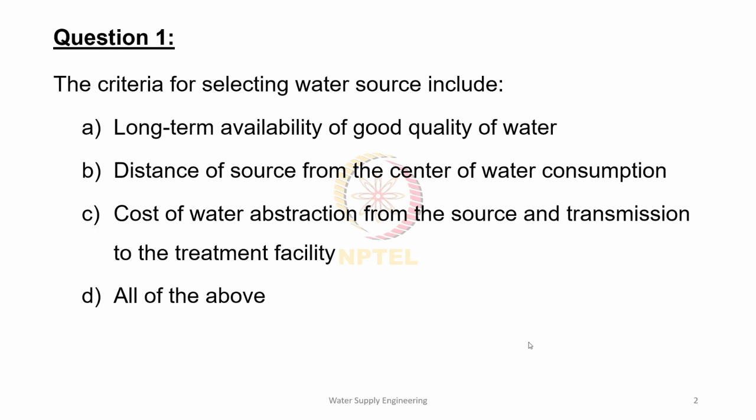All right, so we'll see what is the answer. Yes, correct answer is all of the above, as you have answered. So what are the criteria for water source selection?

When we plan to develop or design a water distribution network for a city or a place, the first thing we need to know is the demand, the requirement that we saw in earlier classes - how we calculate demand, what factors are to be considered while calculating demand. Now, once we know the requirement of the city, the next thing to select is the source of water.

Which one is best suited for that city is to be identified. For that, we have certain criteria. The first one is characteristics of source or sources of water and water itself. Second one, regional geographic properties. Third one, feasibility for stage wise development. And fourth one, economics and cost. So these four factors are to be always considered while selecting the water source.

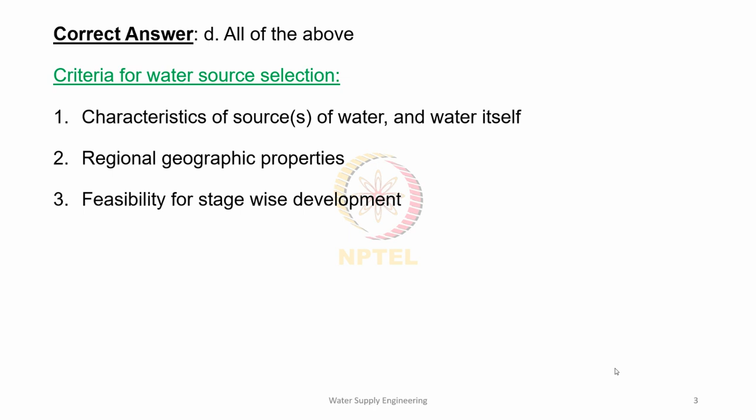The first one is characteristics of source of water and water itself. The first thing we need to check upon is the characteristics or the quality of the water source as well as the water available. It includes availability of water, that is the quantity available, and general longevity of the sources - whether it is available for a short term or for a long term.

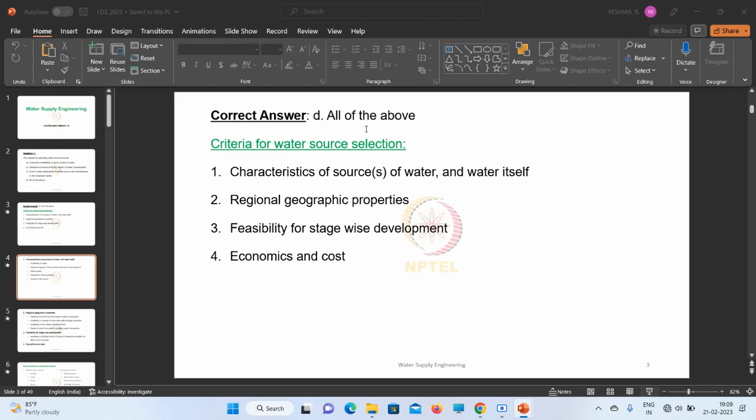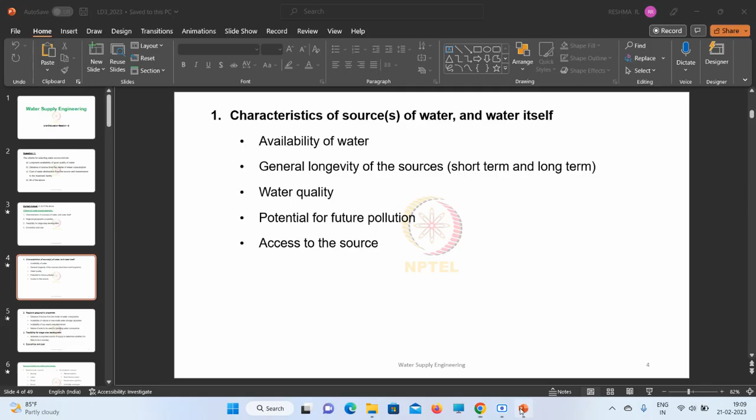So we were talking about the characteristics of sources of water and water itself. It includes the quantity available as well as the longevity of the sources. Longevity of the sources indicates the term over which the water is available, whether it is a permanent source or a temporary source. If it is temporary, whether short term or long term availability is there - all these factors we have to consider.

The water quality, which is the most important factor to be considered, is water quality. When it comes to quality, when we check the present quality status of the water, we need to make sure that the water won't be polluted in the future as well. That is the fourth point - potential for future pollution. Even though the water is fit for drinking or domestic purposes in the present status, we should ensure it will be the same in the future, that it should not get polluted.

And the last one is access to the source. We should be able to reach up to the source so that we can take as much water as we need to the required consumer point. So this is the first factor or first criteria that we consider while we select the source of water for the water distribution network.

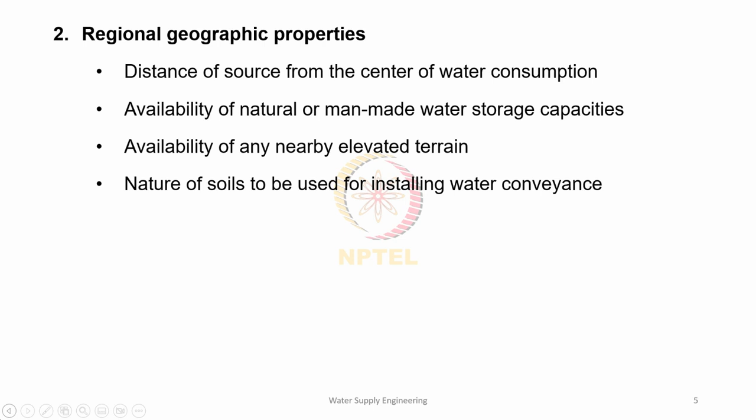Moving on to the next criteria for selecting the water source: feasibility for stage-wise development. Feasibility study means we have to assess whether a proposed source of supply is likely to be a success or not. So once we have selected a source, we need to make sure it will be a success by conducting a feasibility study at each stage of development, to assess whether it is feasible or not.

The last criteria is economics and cost. Even though all the other criteria are met, if the cost of construction and maintenance exceeds our available budget, we may not be able to go forward with that source of supply, and we may have to change it. So economics and cost also play a role in deciding the source of water for the water supply system.

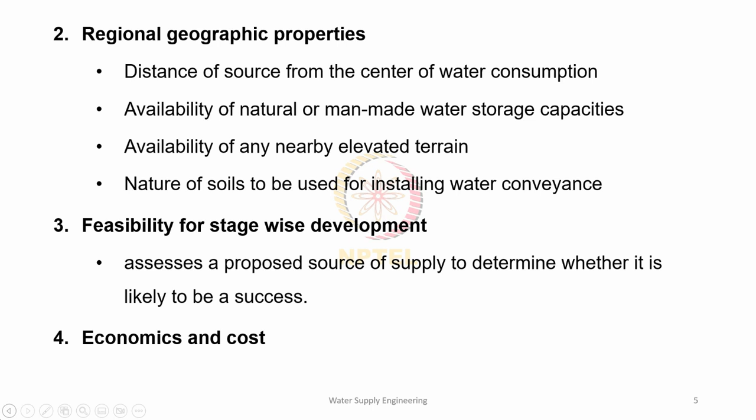Now, having seen all the criteria for selecting a water source, we'll see which are the sources of water for public water supply. The first set is surface water sources, which include springs, lakes, ponds, rivers, reservoirs, estuaries, and wetlands.

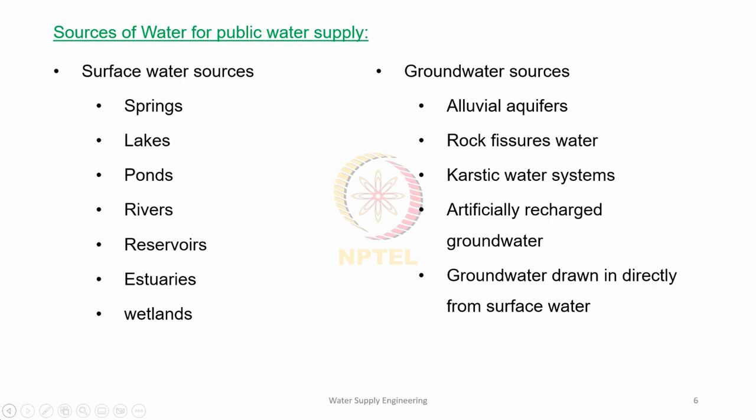Second, we have groundwater sources like alluvial aquifers, rock fissure water, karstic water systems, artificially recharged groundwater, and groundwater drawn in directly from surface water. We also have atmospheric water in the form of rain and storm water, recycled wastewater, and brackish or saline waters.

Atmospheric water, as everyone knows, is rainwater or storm water that comes as precipitation from the atmosphere down to earth. Recycled wastewater is nothing but water that is recycled after first use and provided again for reuse, usually for flushing, gardening purposes, etc.

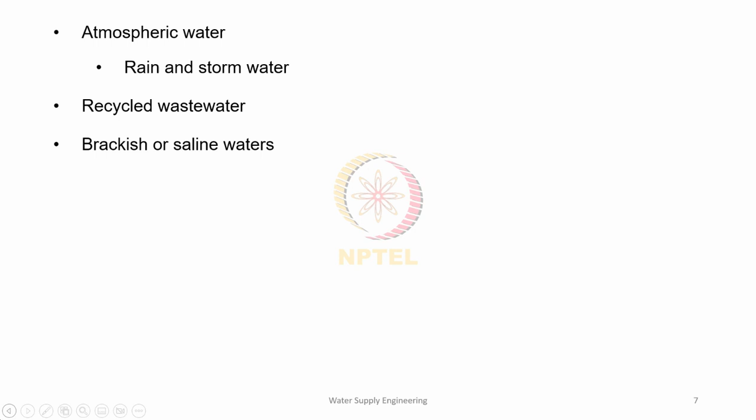The third one, brackish or saline water, is water from the ocean, which we desalinate and then supply. So among these, surface water and groundwater are the first sets we'll look at. First we will go through each of the surface water sources, and then we'll check the groundwater sources.

The first surface water source is spring. What is a spring? They are natural exit points at which groundwater emerges out of the aquifer and appears on the earth's crust to become surface water. So springs are actually groundwater emerging at a particular point on the ground surface to form surface water. It is part of the water cycle as well as the hydrosphere.

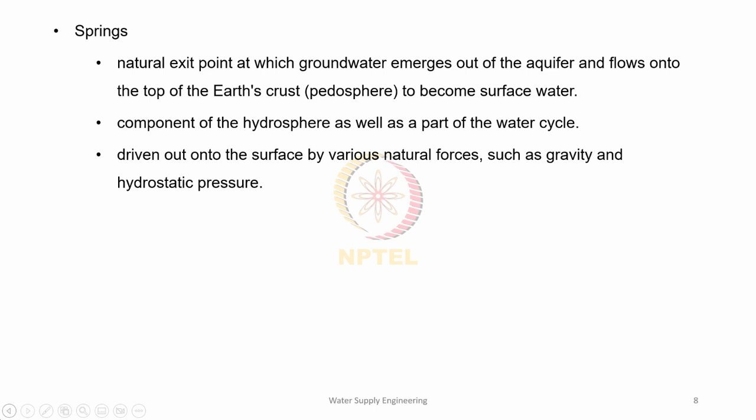This emerging of water at the exit point happens due to many natural forces, for example gravity or sometimes hydrostatic pressure, but the forces are purely natural. Some natural force acts on the groundwater and thus it emerges at the exit point, forming surface water.

The second surface water source is lake. Lakes are also naturally occurring, relatively larger water bodies but completely surrounded by dry land, with the flow much slower than any inflow or outflow streams that feed or drain it. That means it has very less flow rate compared to the feeder or draining streams, and they lie completely on land, not connected to the ocean like rivers. Rivers have a connection to oceans, but lakes are completely bounded by dry land.

Also, we have freshwater lakes as well as saltwater lakes, and these saltwater lakes can have salinity even higher than that of seawater.

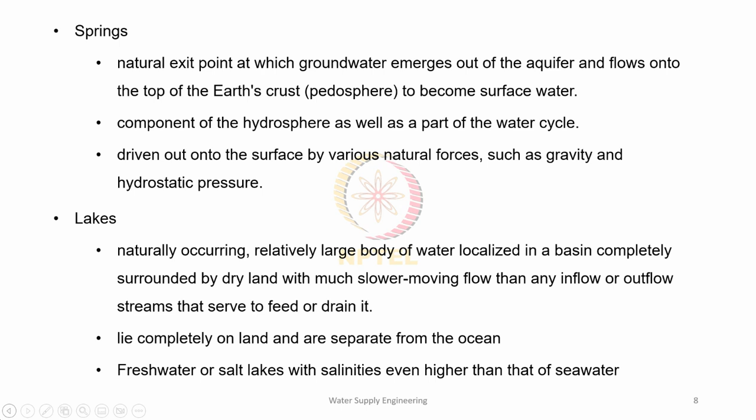Moving on to the third surface water source, that is pond. A pond is a small, still, land-based body of water formed by pooling inside a depression, either naturally or artificially.

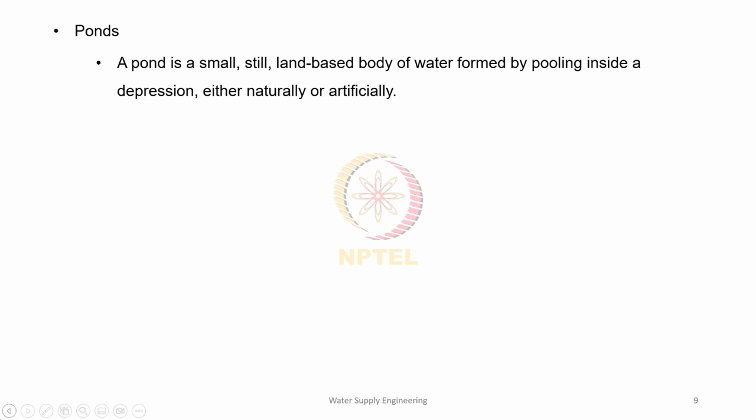Earlier we told springs and lakes were naturally occurring and had some flow, but when it comes to ponds, they can be made either naturally or artificially. The fact is that the water will be still and it will also be bounded by dry land.

The next one, the rivers, they are natural flowing water courses, usually freshwater streams. They may flow over the surface of the earth or may move towards another water body at lower elevation, for example joining an ocean, bay, sea, wetland, or even another river. Then we call it tributaries, major river, etc.

And during its course of time, it may even get dried, it may flow into the ground as well. And if the rivers are small, they may be called creek, brook, or rivulet.

The next surface water source, the reservoir. Reservoir is actually the enlarged lake that we see behind the dam. It can be a man made structure constructed to store water or maybe a naturally occurring formation.

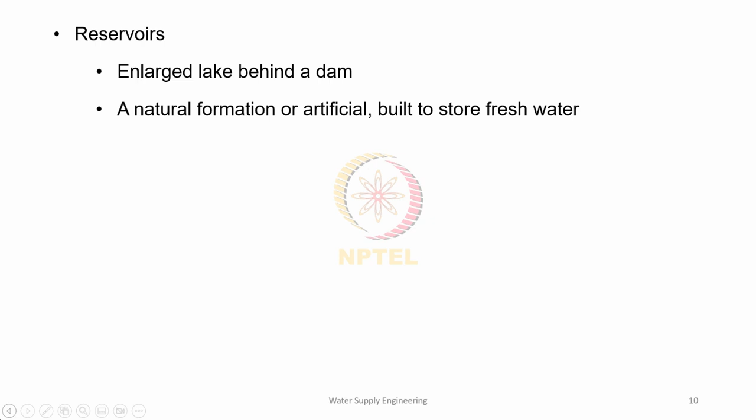The next one is estuaries. Estuaries are actually partially enclosed coastal bodies. On one side it will have the brackish water from ocean, and the other side it will have the inflow from the river or stream. Thus, it can be considered as a meeting point of river or stream with ocean.

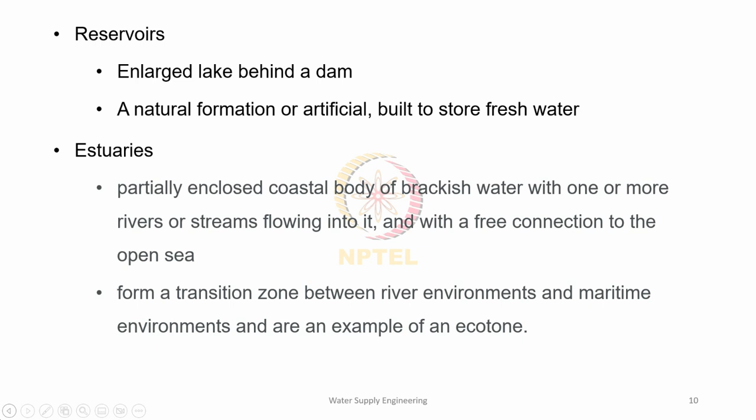Maritime environments and river environment conjunctions are examples of an ecotone or estuary. So estuaries always have one side brackish water and the other side fresh water from a river or stream.

The next one we have is the wetland. Wetlands are ecosystems with fresh or brackish water, as we saw in the case of lake. This can be a permanent covering or a temporary covering of water over the soil. Temporary in the sense it can be seasonal depending upon the weather or climate, for example it may exist only during monsoon season time.

Now, according to Article 1.1 of the Ramsar Convention, which is an intergovernmental convention on wetlands, wetlands are defined as marsh, fen, peat, and or water, whether natural or artificial, permanent or temporary, with water that is static or flowing, fresh, brackish, or salt, including even the areas of marine water, the depth of which at low tide does not exceed 6 meters. So this is the exact definition for wetland according to Ramsar Convention.

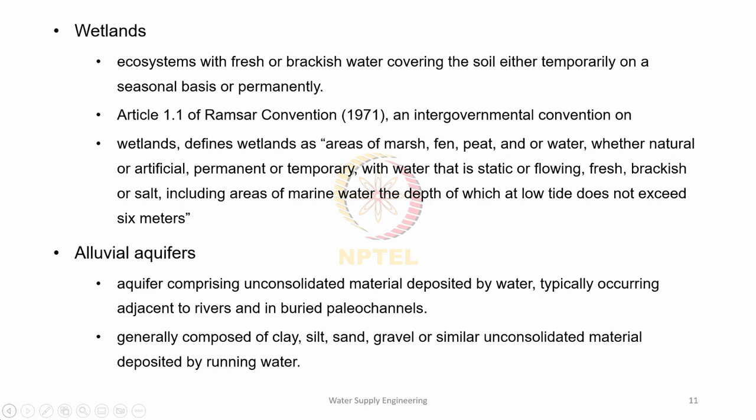Then we have artificially recharged groundwater. That is, if the groundwater potential is very low, if the available groundwater cannot meet the requirements, we may artificially recharge the groundwater. There are various means for that. For example, we can redirect the water across the land surface through canals so that it may infiltrate.

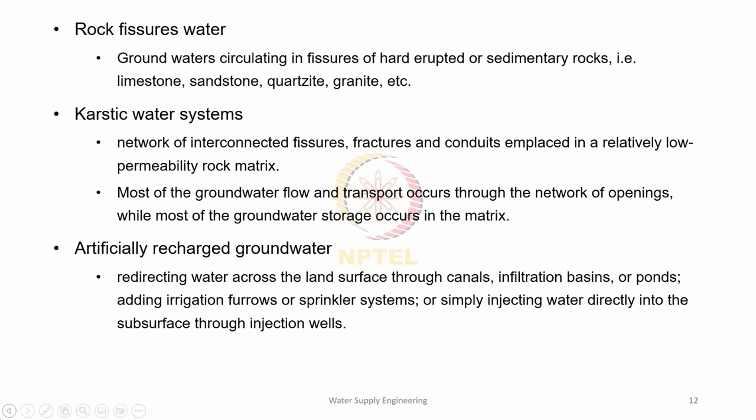Or we can use injection wells. Injection wells are nothing but wells where we directly inject water into the subsurface through these wells, applying water directly into the subsurface. So these are the different sources.

Last one is groundwater drawn directly from surface water. We have seen so many surface water sources, and due to infiltration or other gravity flows, this surface water can go deep through infiltration, percolation, etc., directly into the groundwater.

So these are the different sources of water, and we saw the criteria for selecting the best suited source of water for each particular case.

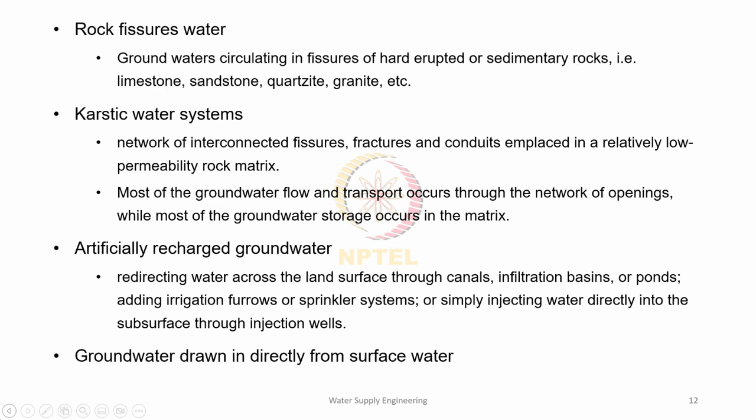Now we'll move on to the next question.

Question number 2. For surface water intake, the common type of shape provided for water entry through the inlet pipe of raw water from collection unit is: option A, concave type entry; option B, bell mouth entry; option C, flat type entry; option D, none of the above. So which is the common shape adopted for water entry through the inlet pipe of raw water in case of surface water intakes?

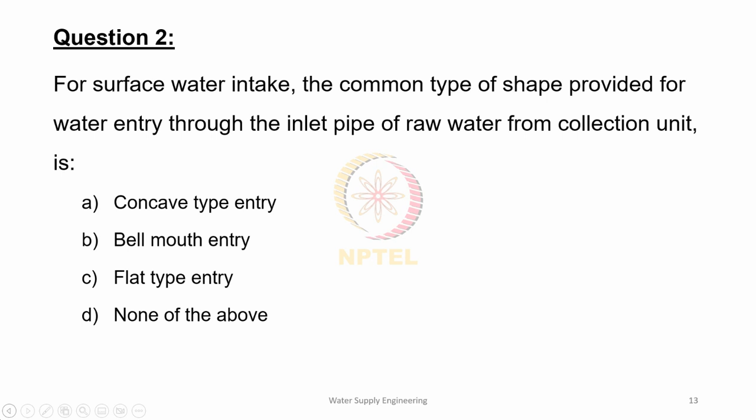Okay, we'll see the answer. Yes, option B, bell mouth entry. So generally, that bell mouth shape is provided for surface water intakes.

And in order to prevent entry of trash or any other material into the intake structure, we provide a fine screen at the bell mouth.

Moving on to the third question. River intakes, if situated in a navigation channel, are protected by: option A, providing a wire mesh on intake inlets; option B, constructing a sufficiently deep intake foundation; option C, constructing a cluster of piles all around the intake; option D, all of the above.

So if we are having a river intake in a navigation channel, how can we protect that particular intake? Is it A, B, C, or all of them?

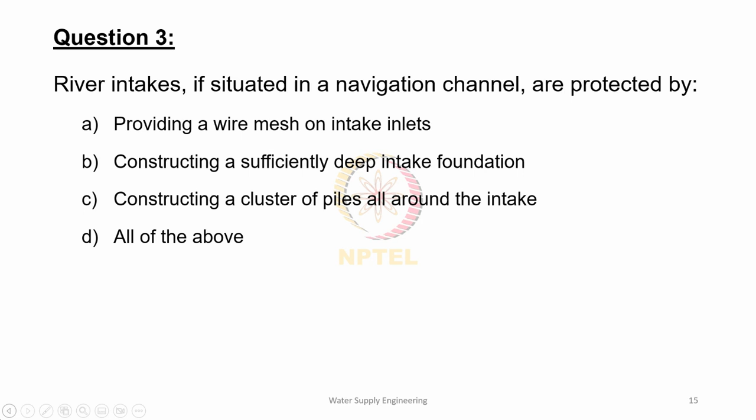Okay, we'll see what is the answer. Correct answer is option C, constructing a cluster of piles all around the intake.

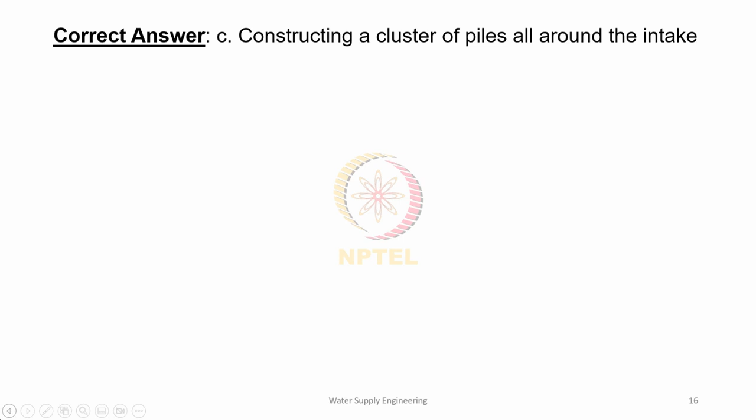So if we are putting our intake in a navigation channel, then we need to construct piles all around the intake so that that particular intake is protected from the incoming barges or ships.

There are certain criteria for the positioning and construction of intakes. The intake should not be constructed in a navigation channel as far as possible, because there are chances for disturbances in the water as well as sediment deposits or suspended sediments because of the in-and-out movement of ships and barges. So as far as possible, we should avoid constructing intakes within a navigation channel.

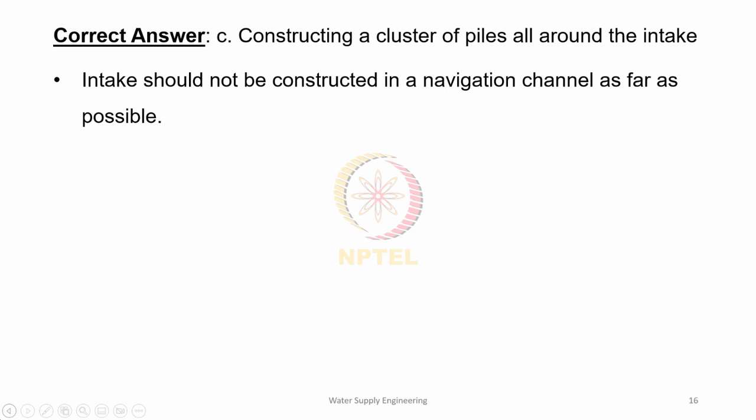Second, if it has to be constructed, it should be protected by a cluster of piles all around from forces caused by moving ships and steamers. That is the answer for this particular question: it should be protected firmly by constructing piles all around.

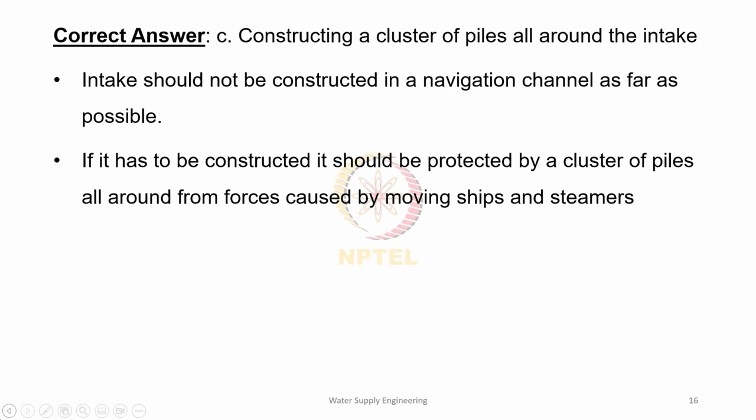Then option A was strainers in the form of wire mesh. This we actually provide on all intake inlets so as to avoid entry of large floating objects and fishes. In order to prevent the entry of fishes or any trash or unwanted objects into the intake, we usually provide wire mesh, and this we provide on all kinds of intakes.

Then the other option was providing a sufficiently deep intake. But this is actually provided to avoid overturning of the structure. The depth is increased, or sufficiently deep intakes are provided, so as to protect that intake structure from overturning.

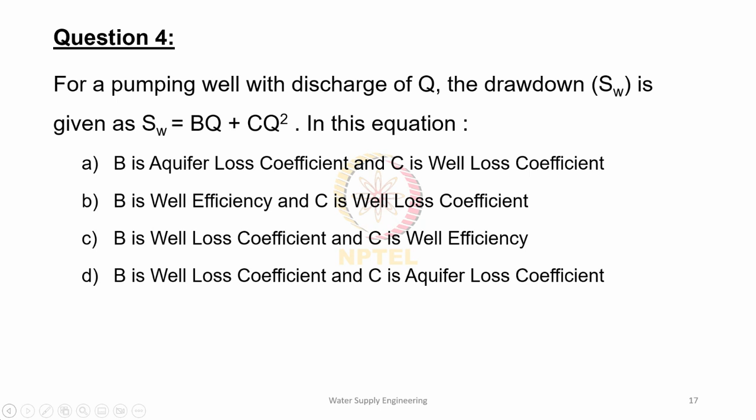Okay, we'll see the answer. I don't have any answers in the chat box yet. Okay, we'll see the answer.

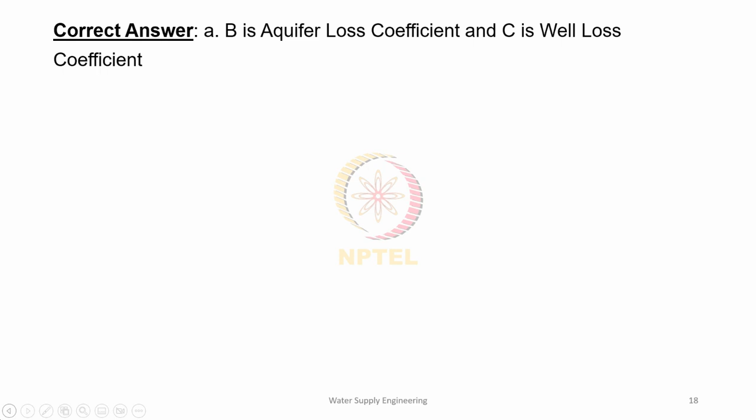The correct answer is option A: B is aquifer loss coefficient and C is well loss coefficient. In the drawdown equation SW equals BQ plus CQ square, SW is the drawdown, B is the aquifer loss coefficient, C is the well loss coefficient, and Q is the discharge. BQ represents aquifer losses and CQ square represents well losses. So the drawdown equation is drawdown SW equals sum of aquifer losses BQ plus well losses CQ square.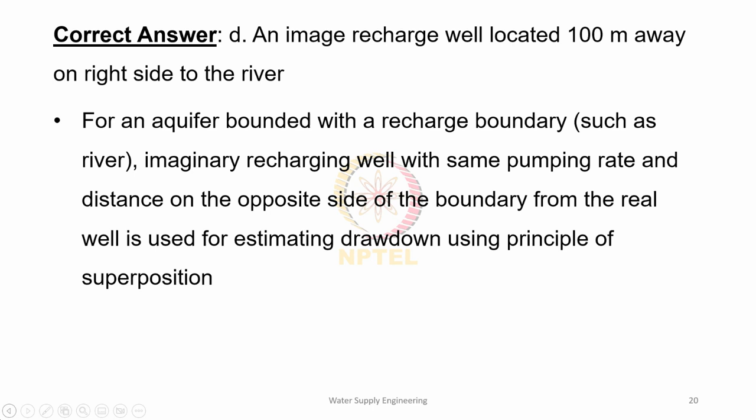Moving on to the next question. In transient state analysis, for a given discharge, the drawdown due to a pumping well in a confined aquifer is considered as a function of: option A, location; option B, time; option C, both location and time; option D, neither location nor time. So in the case of transient state analysis, what is the equation for drawdown? You need to think of it, and then you will get to know whether it is a function of location or time, or both location and time, or it is independent of location or time. So what is the equation for the drawdown due to a pumping well in a confined aquifer according to transient state analysis?

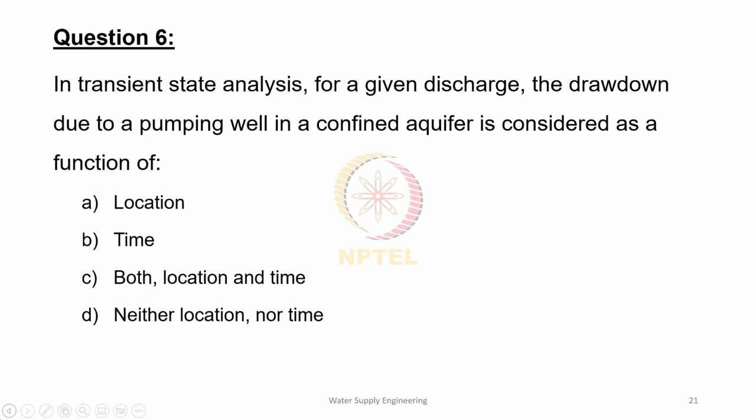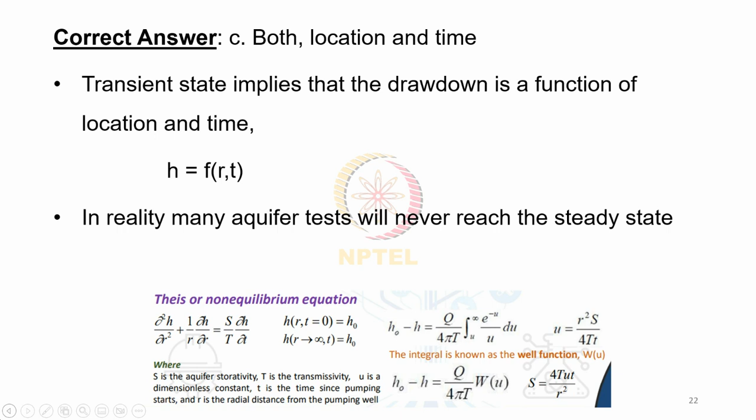Okay, we'll see the answer. Correct answer is option C, both location and time. So transient state implies that drawdown is a function of location and time. In reality, many aquifer tests will never reach the steady state, and the cone of depression will continue to grow over time. So, according to the transient state analysis, by Theis or non-equilibrium equation, we have...

dou square h by dou r square plus 1 by r dou h by dou r is equal to S by T dou h by dou t, with h at r comma t equal to 0, that is initial state, is h naught, and h when r tends to infinity and at time t is also equal to h naught. Here, capital S represents the aquifer storativity, small letter r is the radial distance from the pumping well, t is the time since pumping started, capital T is transmissivity, and u is a dimensionless constant.

So we have h0 minus h as q by 4 pi T integral u to infinity e raised to minus u by u du, where u is given by r square S by 4 T t, and that integral is known as the well function W of u. So if we substitute that value, we have h0 minus h according to Theis or non-equilibrium equation as q by 4 pi T times W of u, and capital S, as storativity, is 4 T u t by r square.

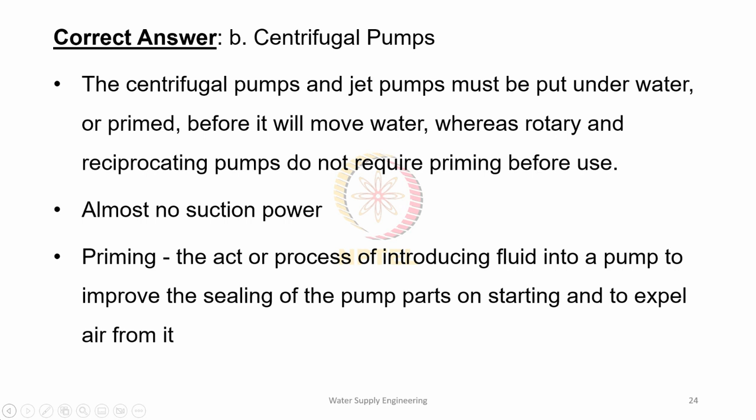And to expel air from it. Now, if we are not doing priming, it will start sucking the dirt or soil beneath the water as well, and air will be there inside the pump parts. So to avoid that, we need to introduce that particular fluid which the pump is going to pump up. That particular process is termed as priming, and this is required for centrifugal pumps and jet pumps, and these are not required for reciprocating pumps or rotary pumps.

Moving on to the eighth question.

An aquifer bounded on both above and below by impervious strata where groundwater is restrained under pressure is known as: option A, confined aquifer; option B, unconfined aquifer; option C, leaky aquifer; option D, idealized aquifer.

So there is an aquifer which is underlain and overlain by impervious strata, and hence the groundwater is restrained under pressure within the aquifer. What kind of aquifer is that? Is it a confined aquifer, unconfined, leaky, or an idealized aquifer?

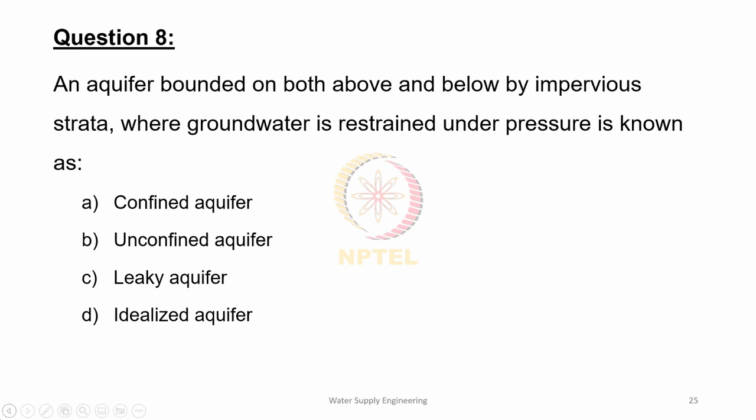Okay, so I think most of you know the answer. Yes, it's option A, confined aquifer. So, confined aquifer is an aquifer that is underlain and overlain by impervious strata, restraining the groundwater under pressure.

Now, we have different types of aquifers, that is confined or pressure or artesian aquifer, unconfined or phreatic aquifer, perched aquifer, and leaky aquifer. So we'll see one by one.

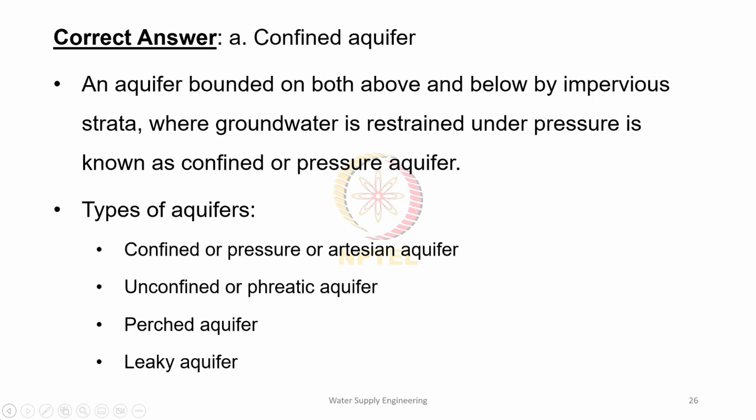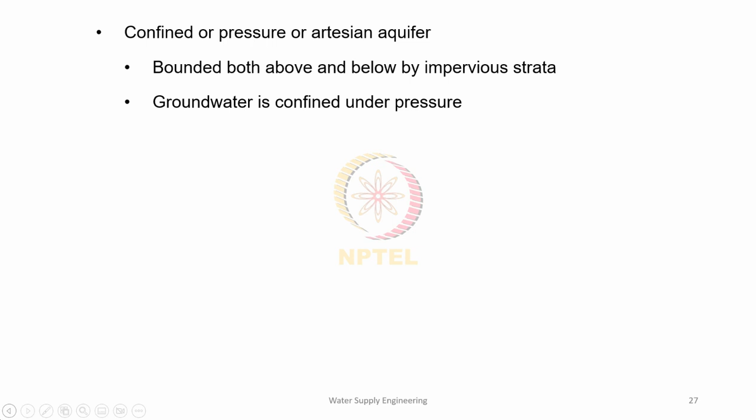So as we saw, confined aquifer or pressure aquifer or artesian aquifer is the one that is bounded both above and below by impervious strata, and the groundwater within this confined aquifer will be restrained under pressure.

Unconfined or phreatic aquifer is the one that is bounded by a free surface at the upper boundary, and that free surface of water forms the water table or phreatic surface, with water occurring at atmospheric pressure. So there is no pressure. It's not confined under pressure. It's free to atmosphere. Next we have perched aquifer.

This occurs whenever a groundwater body is separated from the main groundwater by a relatively impermeable stratum of small areal extent, as well as by a zone of aeration above the main body of groundwater. So it will be actually separated from the main groundwater body. It will be like a separate formation with a very small quantity of water, that is perched aquifer.

Then we have leaky aquifer. Leaky aquifers are actually, as the name says, having some leak either inwards or outwards. So it is overlain or underlain by a semi-pervious aquitard or semi-confining layer, so that there is some loss or gain of water happening through the adjacent layers.

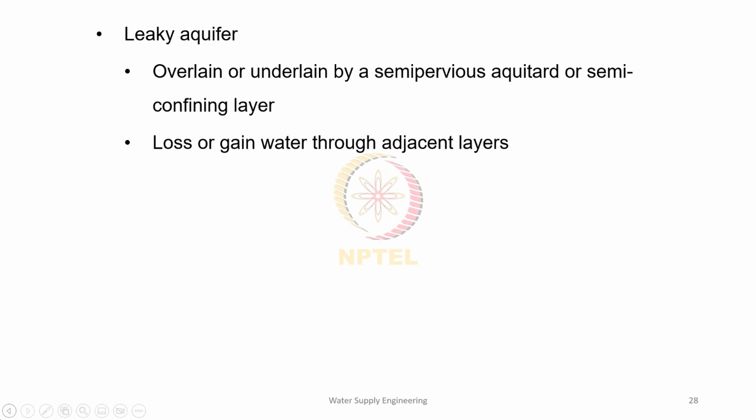Now we have different types of geological formations as well. So far we saw the different types of aquifers. We have other geological formations, namely aquitard, aquiclude, and aquifuge. So we'll see what is the difference between each of them.

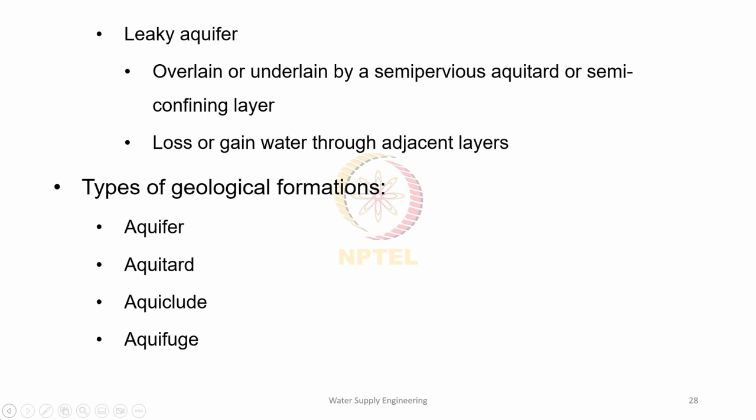So aquifer is actually a formation that contains sufficient saturated permeable material to yield significant quantities of water. That is, aquifers will contain a good quantity of water as well as transmit a good quantity of water. These are generally aerially extensive and may be overlain or underlain by a confining or impervious bed, depending upon the mode of confinement. We earlier classified them as confined aquifer, unconfined aquifer, etc.

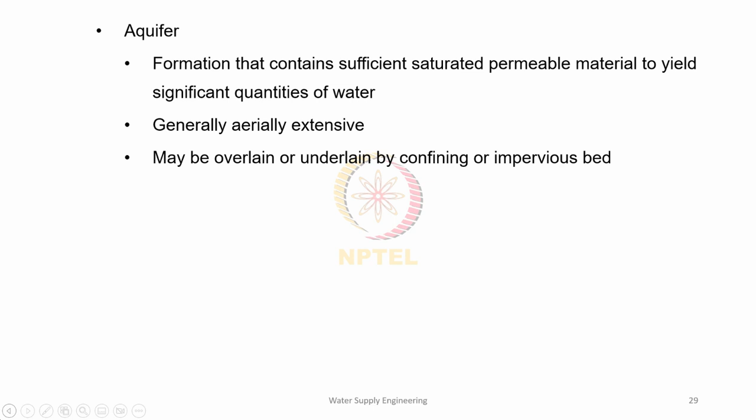So the next one is aquitard. Aquitard is also actually saturated, and it also contains sufficient amount of water, but the permeability of the layers is very less, so it will restrict the groundwater movement. It does transmit water, but the rate will be very low. That is, it does not yield water freely to wells, but within the aquifers, from one aquifer to another, at a very slow rate, it can transmit water. For example, sandy clay.

The next one is aquiclude. Aquiclude is also saturated, but it is impermeable. It won't transmit any good quantity of water, neither in the wells nor among the aquifers. Example is clay.

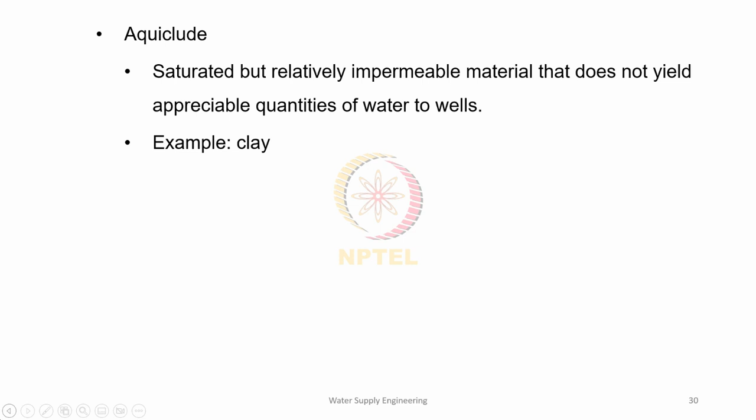Then we have aquifuge. Aquifuge is actually an impermeable formation. It doesn't have water and it cannot transmit water, for example solid granite. I hope that is clear. So we saw the different types of geological formations, that is aquifer, aquitard, aquifuge, and aquiclude, and we saw different types of aquifers: confined aquifer, unconfined aquifer, perched aquifer, and leaky aquifer.

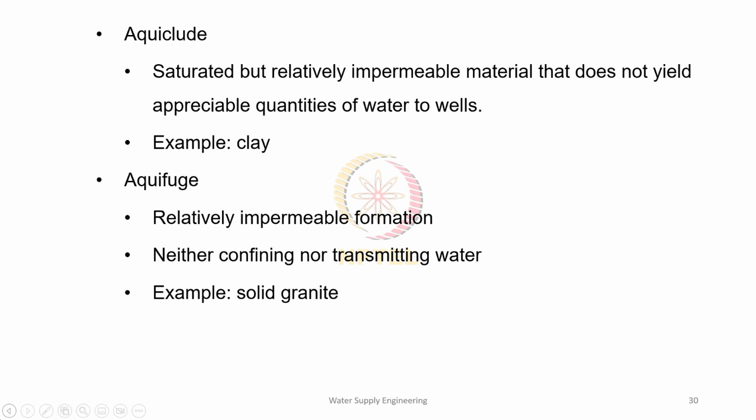All right. Moving on to the ninth question.

Currently, the most common conveyance system for water in water supply projects is: option A, pressure pipes; option B, open channels and flumes; option C, gravity tunnels; option D, aqueducts. So, which is the most common conveyance system for water in water supply projects that we adopt today?

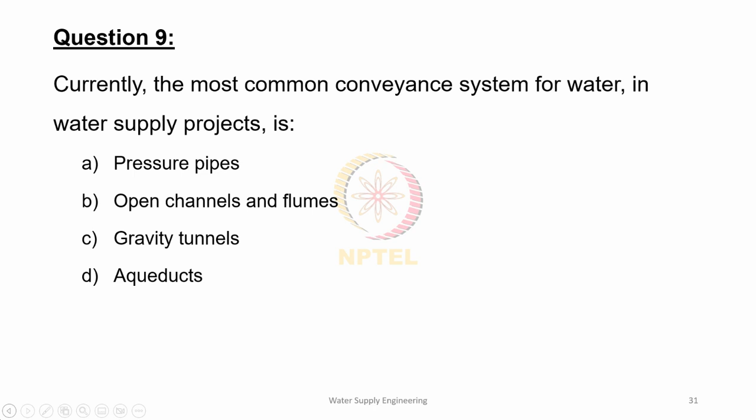Okay, I have got answers as option A. Yes, correct answer is option A, pressure pipes.

Currently, pressure pipes are the most common and they have nearly eliminated open channels, aqueducts, and tunnels. The issue with open channels and aqueducts is that evaporation losses and theft can be very much, and with tunnels, the problem is difficulty in installation and high initial cost. So due to all these reasons, pressure pipes have become common these days.

We have many materials used for construction of these pressure pipes depending upon the type of water flowing through it, whether it is fresh water or wastewater, and depending upon the requirement. For example, cast iron, steel, galvanized iron, copper, PVC, asbestos cement, and concrete are common. But recently asbestos cement has been avoided from the list because of the cancer-causing elements in it, so now we are mostly using PVC pipes. Large concrete pipes are there for wastewater supply.

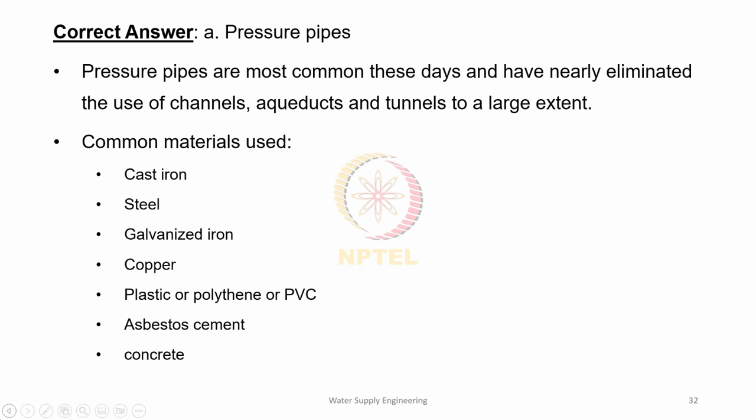Then we have steel and cast iron. So asbestos cement is being avoided these days. Okay, moving on to the next question, it's a numerical problem.

The specific retention of a soil strata with a porosity of 0.34 and a specific yield of 0.19 is: option A, 0.34; option B, 0.81; option C, 0.53; option D, 0.15.

So we are given the porosity as well as the specific yield, and we are asked to determine the specific retention. I'll give you one minute for the calculation.

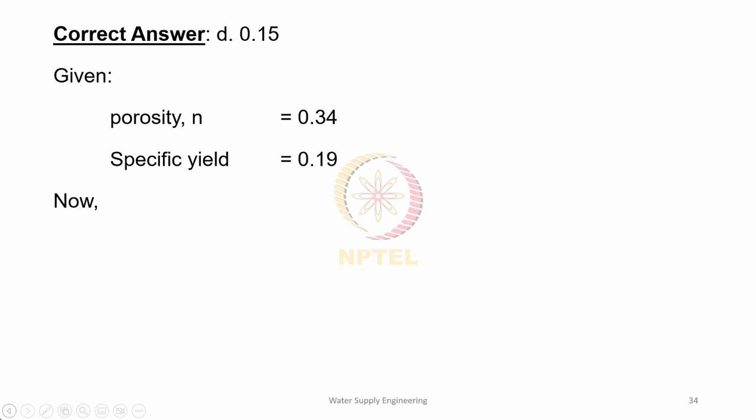Given porosity N is equal to 0.34, specific yield is equal to 0.19. Now we know that porosity is equal to specific retention plus specific yield. So specific retention is equal to porosity minus specific yield, that is 0.34 minus 0.19, which is equal to 0.15.

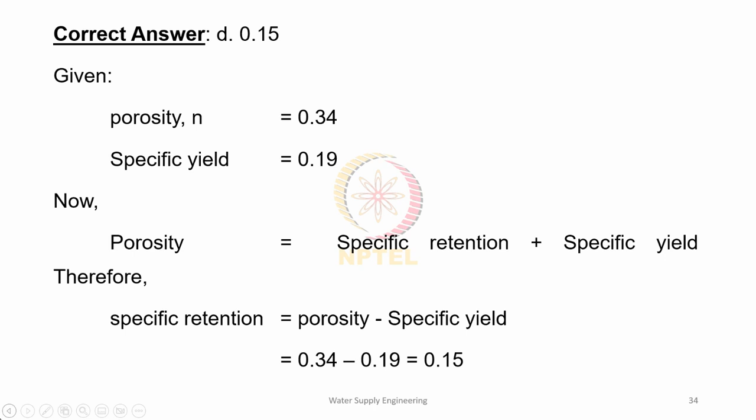We were given the values of porosity and specific yield, and we know that porosity is the sum of specific retention plus specific yield. All right, hope it is clear.

Okay, so there is some mistake in this slide, just now I found it. Can anyone of you point that out? I see many of you are not even interacting, so can I know what has gone wrong in this slide? Can anyone type the mistake in the chat box? Something is wrong in this particular slide, number 35.

Porosity equals volume of void by total volume. Yeah, exactly. Okay, so at least I could see some interaction, thank you. I don't know any other way to make you people interact, because even if I ask you to type in the answers, only at max two or three people reply.

Okay, thank you, so now I'll change it to the correct one. Can I know what is the particular definition I had written, what does that refer to? That is the ratio of volume of voids to volume of solids. What is that term? That is void ratio, I think. Yeah, it is void ratio, yes, you are correct. So void ratio is basically volume of voids by volume of solids, and porosity is volume of voids by total volume. Okay, thank you.

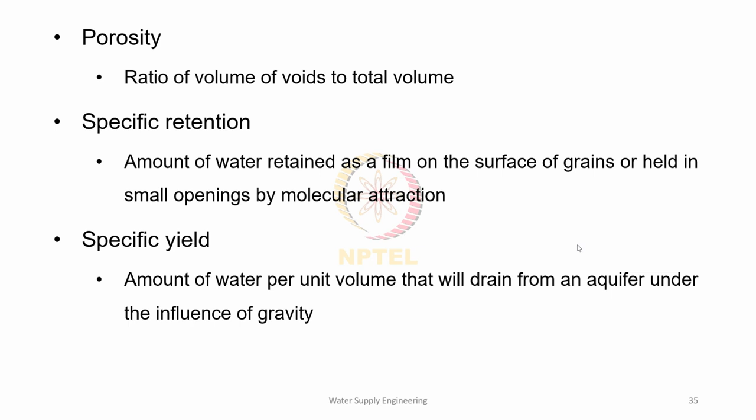Hope that is clear. Moving on to question number 11: match the types of raw water sources with appropriate examples. In the first column we have different types of water sources like groundwater source, atmospheric source, unconventional source, and surface water source. In the next column we have lake, aquifer, rainwater, and recycled wastewater.

So which is the correct match? Option A: A1, B4, C3, D2. Option B: A1, B3, C2, D4. Option C: A1, B3, C4, D2. Option D: A2, B3, C4, D1.

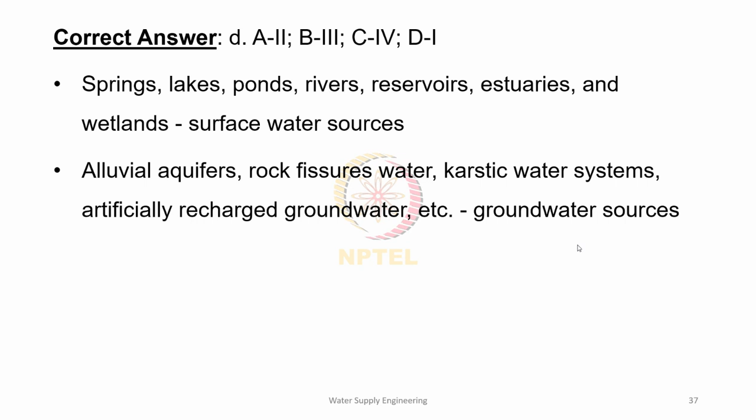As we saw earlier, spring, lake, pond, river, reservoir, estuaries, wetlands all form surface water sources. So our lake is a surface water source. Then we have alluvial aquifer, rock fissures, karstic water system, artificially recharged groundwater, etc. which come as groundwater sources.

The rain and stormwater consists of atmospheric water source, and recycled wastewater is basically an unconventional source of water supply.

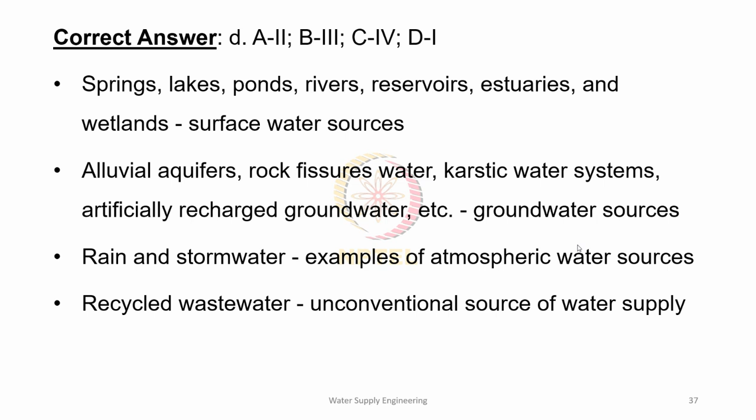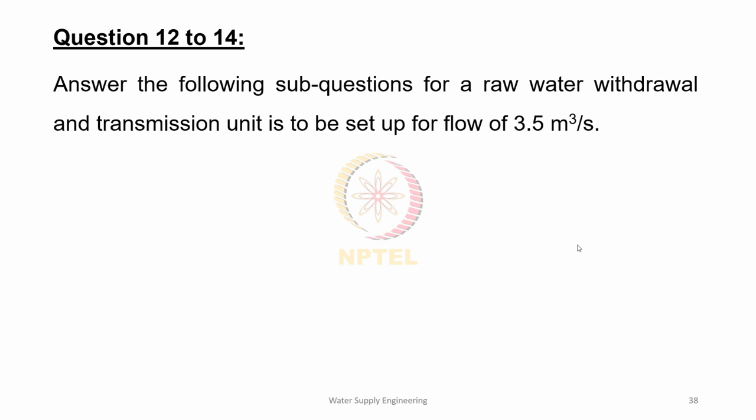Now, for questions 12 to 14, answer the following sub-questions. For a raw water withdrawal and transmission unit is to be set up for flow of 3.5 meter cube per second. So we are going to design a raw water withdrawal and transmission unit, and the flow requirement is 3.5 meter cube per second. The first question, question number 12, is: what is the raw water transmission pipe diameter required to ensure approximate flow velocity of 2 meter per second?

So we have the flow requirement as 3.5 meter cube per second, and the required flow velocity as 2 meter per second. Then what is the required pipe diameter for the transmission line is the question. There are no options, it's a numerical type, so please type in the value of the diameter required in meters.

I'll give you 2 minutes for that. I think that is sufficient if you have a calculator with you. So we have the flow rate and we have the required flow velocity. We need to calculate the pipe diameter. Basic discharge equation can be used.

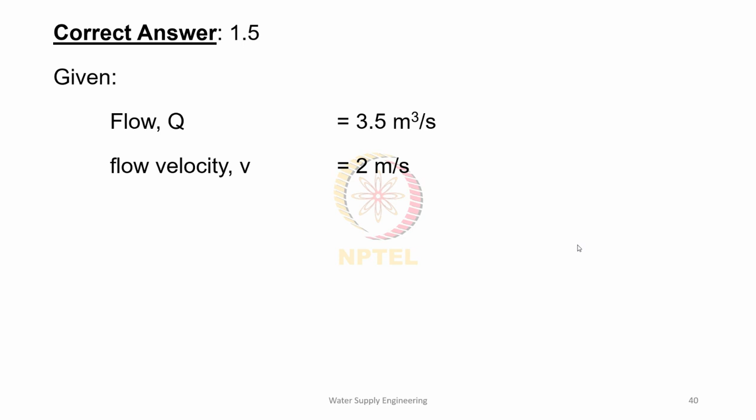So it's given that flow Q is equal to 3.5 meter cube per second, flow velocity V is equal to 2 meter per second. So cross-sectional area, in order to determine the diameter of the pipe, we need to determine the cross-sectional area. We know that flow Q is equal to A into V, that is cross-sectional area into flow velocity. So cross-sectional area is equal to flow or discharge by flow velocity, that is Q by V, which is equal to 3.5 by 2, which is 1.75 meter square.

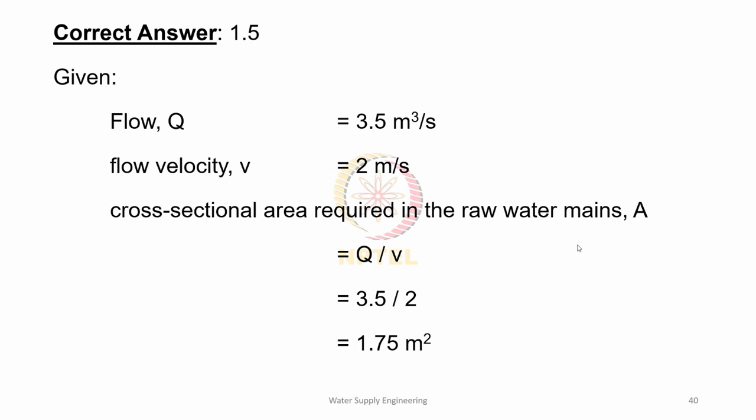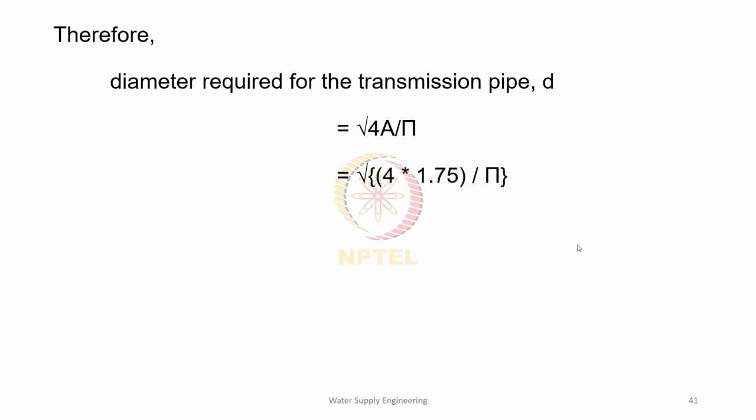Now we know that cross-sectional area of a circular pipe is equal to pi by 4 d square. So rearranging for the diameter, we have d is equal to square root of 4A by pi. Substituting, we have square root of 4 into 1.75 by pi, which is 1.493, or approximately 1.5 meters. Hope that is clear to everyone.

So, the next question, question number 13: if the distance from source to reservoir is 1.6 kilometers, what is the frictional head loss in raw water transmission, assuming friction factor as 0.032?

So we have the same flow here, that is 3.5 meter cube per second, and the flow velocity 2 meter per second. So if the distance from source to our storage reservoir is 1.6 kilometers, that is if we have to transmit the water over 1.6 kilometers, then what would be the frictional head loss happening over this transmission line? They are given friction factor as 0.032. So what will be the head loss that is happening?

So I'll wait for another 2 minutes. This is also a simple direct substitution problem. I'll wait for 2 minutes for the answer in the chat box and then we'll see how to solve it.

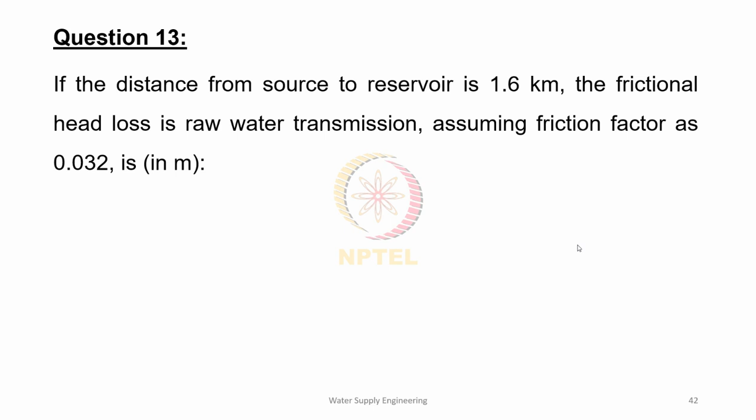Okay, so we'll see what is the answer. I've got two answers in the chat box: 6.95, 6.96. Okay, yeah, so approximately it is 7.

So it's given that distance from source to reservoir is 1.6 kilometers and friction factor is 0.032. So frictional head loss HL is equal to FLV square by 2GD. Here F is given as 0.032, L is the transmission length which is 1.6 kilometers, so converting it into meters we have 1600.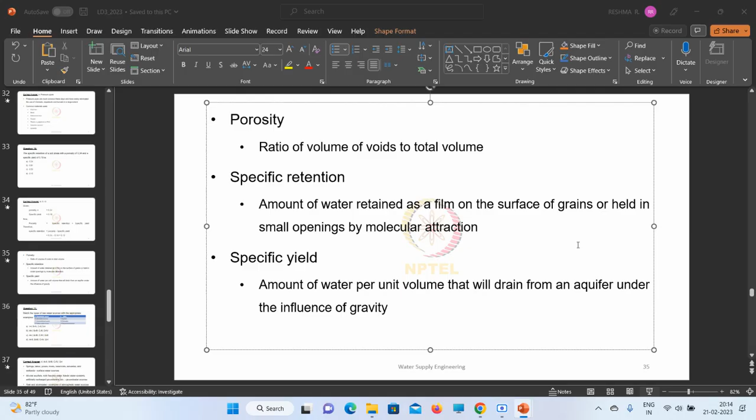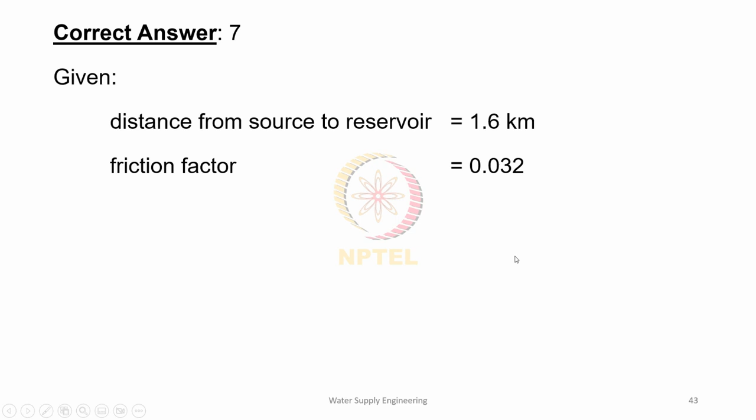And then velocity, it was given in the earlier problem as 2 meter per second. So the square should actually be within the brackets; while putting the brackets I had made a mistake. So v square by 2 into acceleration due to gravity 9.81 into diameter 1.5. So it is approximately 6.9, it's like 6.96 meters, approximately 7 meters.

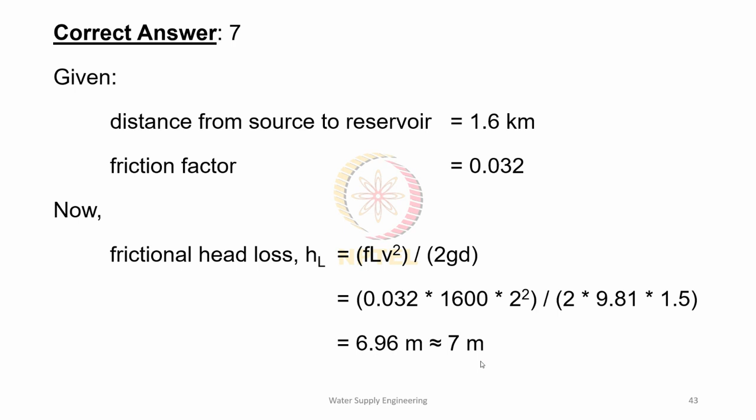All right, so moving on to the next question: BHP of the pump required, assuming pump efficiency as 75 percent.

I am unable to see the question. Oh, 1 second. No, it has changed actually. Is it the same for everyone?

Can you please tell me whether it is visible or not? Yes ma'am, question is visible. Question 14. Maybe the problem is a network issue on your end. I don't know, just please check that. Okay, so BHP of question number 14 we are looking now.

BHP of the pump required is to be determined, assuming pump efficiency as 75 percentage, if the difference in water level of sump and reservoir is 20 meters. Ignore minor losses and take specific weight of water gamma as 9.81 kilonewton per meter cube.

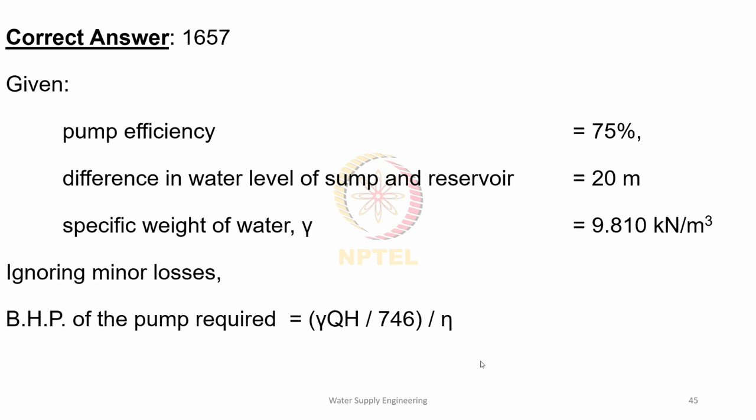Total head to be pumped is suction head plus delivery head plus friction losses plus minor losses. But since we are ignoring minor losses, total head over which water is to be pumped is suction head plus delivery head plus friction losses. Now suction head plus delivery head is the water level difference between sump and reservoir, so it is directly given as 20 meters. And friction losses we had calculated in the previous question as 7 meters. So the total head to be pumped comes to be 27 meters.

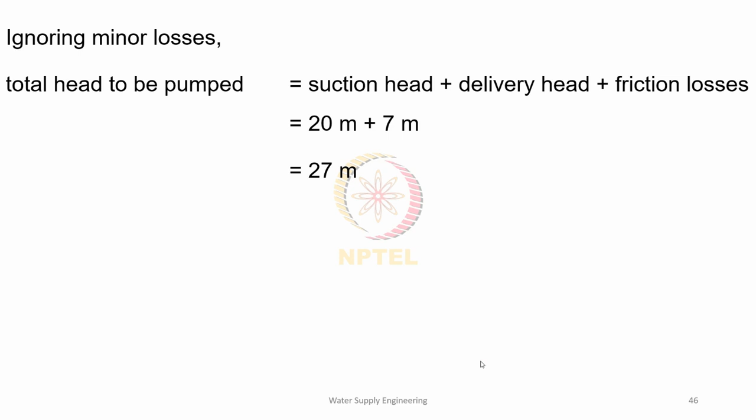Now BHP required is gamma QH by 746 divided by eta. So substituting all the values, it becomes 1657 BHP approximately. Hope that's clear to everyone.

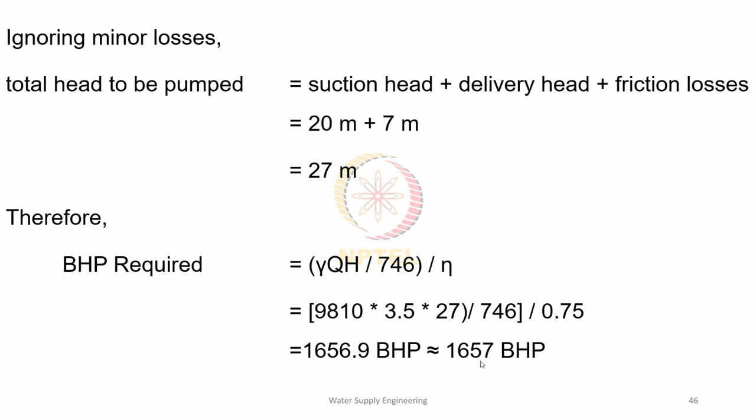So it's regarding the appropriate location of intakes. Which all are the correct statements?

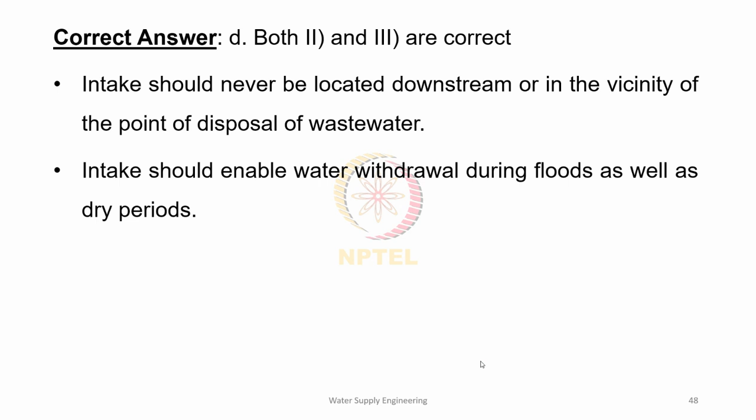The second point is that intake should enable water withdrawal during flood as well as dry period. Throughout the year we should be able to supply water, so we should be able to extract water. The third thing is that intake should preferably be near the plant so that the conveyance required from the source to treatment plant can be reduced and hence it can be made more economical.

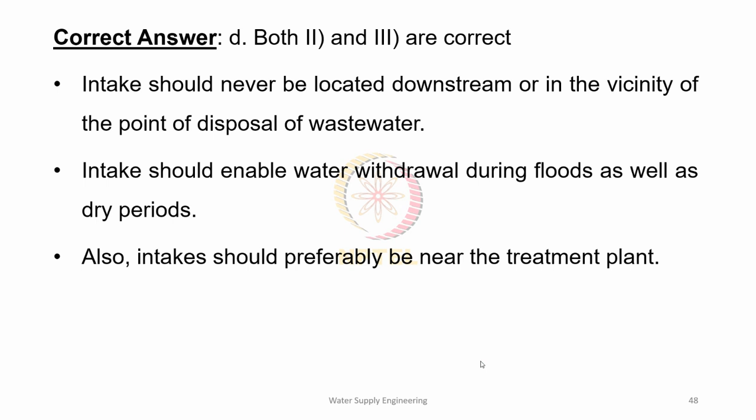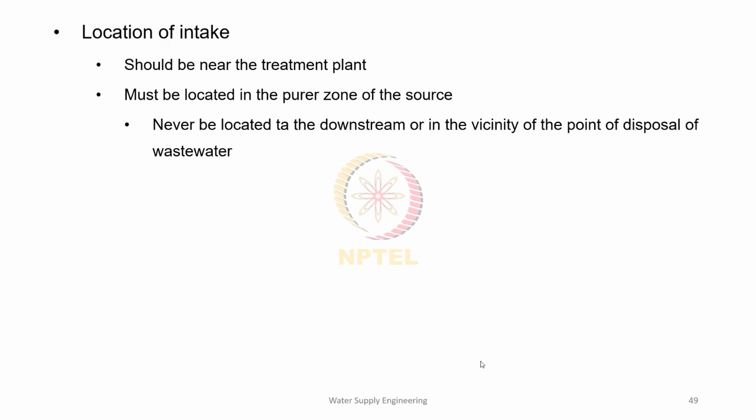So the location of intake should actually be near the treatment plant. It must be located in the purer zone of the source with the least pollution. It should never be located downstream or in the vicinity of the point of disposal of wastewater. Site should be able to fulfill water demand at peak levels.

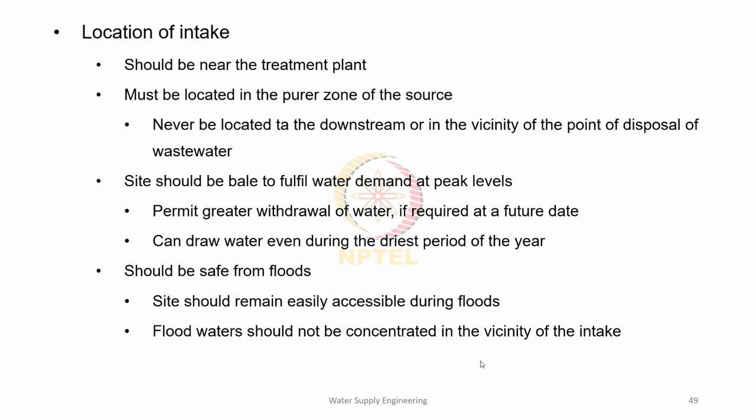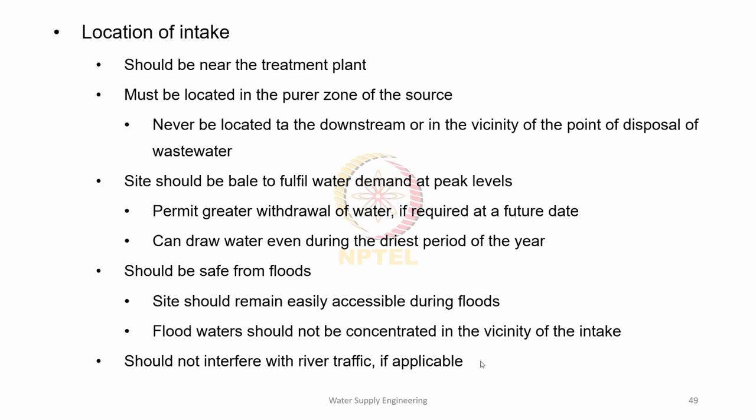That is, it should permit greater withdrawal if required at a future date. Even during the driest period, it should be able to supply water. It should not get destroyed during floods, and it should be easily accessible even during flood times. Also, flood water should not get concentrated in the vicinity of the intake. If we are putting it in a navigation channel, it should not interfere with river traffic. So these are the different factors to be considered while fixing the location of intake.